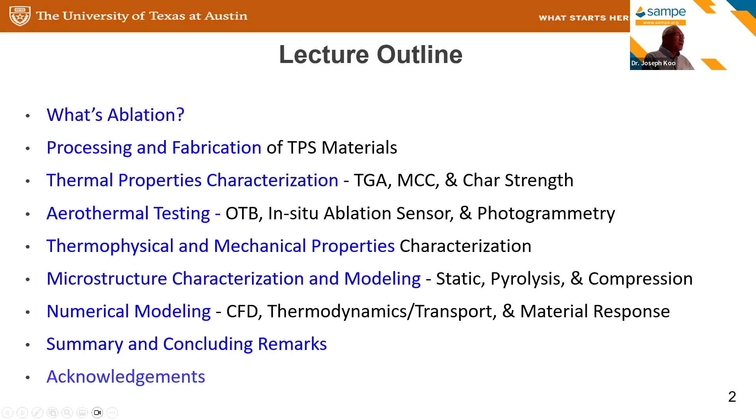And I'll move on to aerothermal testing. Within that particular area, I'll explain what OTB is and the other instruments that we use. I also will introduce you to thermophysical and mechanical property characterization. These are very important. I actually use exactly the same route that we have been using in designing material, analyzing material, as well as doing the microstructure modeling, and last but not least, I'll talk about material response modeling. And eventually I'll give you a summary and conclusion.

Okay, so first of all, I have two slides telling you what ablation is. If you go into the dictionary, you find that ablation is defined as the surgical removal or loss of a part. When it first came into the dictionary, it mostly talked about the thermal process of removal of snow and ice from an iceberg or glacier. But right now, if you Google what is ablation science, you could see laser ablation and thermal protection system ablation, TPS.

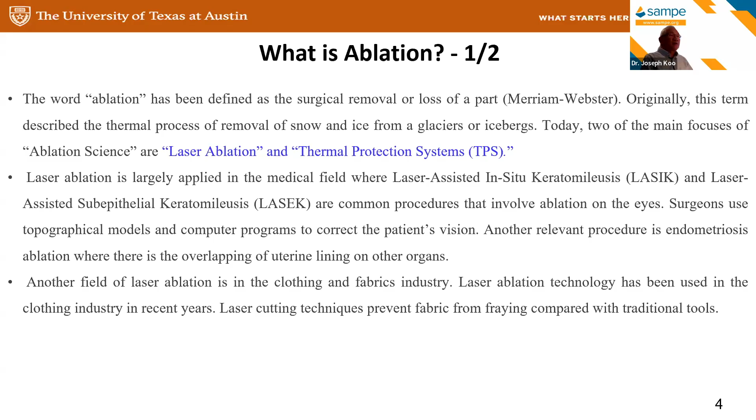I'm going to concentrate on TPS ablation, and I'm going to briefly talk about laser ablation, which is mostly in the medical field, having to do with LASIK and the like, and has been around for a long time. Another area where you could see laser ablation is in the clothing and fabric industry. They use it to cut the fabric so the fabric will not fray. Okay. In this seminar, I'm only concentrating on my area of expertise, which is ablation for thermal protection systems as well as for rocket motors.

Probably everybody knows that in World War II, there was the German V2 missile. That is where the demand for ablative material first started. I think these projects started the space program around the world, and ablative materials have been used for TPS as well as for other applications. I'm going to name a few: reentry vehicles, rocket nozzles, and also insulation for propulsion systems. These are the areas where ablative material has been used. Over all these years, there has been an extensive amount of research on ablative material testing and sensing, ablative material characterization, and numerical modeling. These are all very different areas that I will go over, and they are all interconnected. It's not just one area.

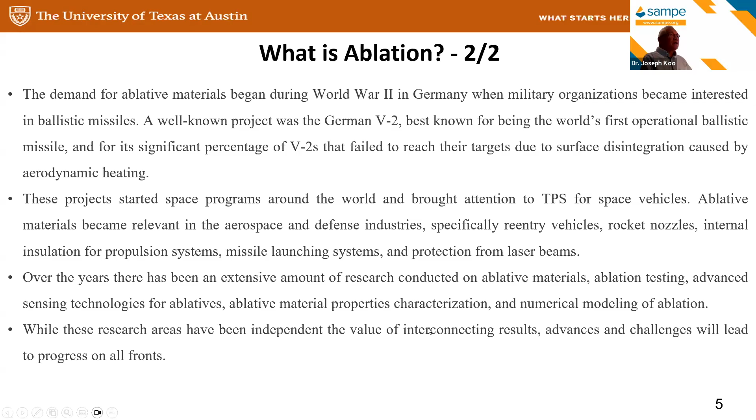Okay, I'm going to show you what we are doing in the Koo Research group. This is a paper I wrote and submitted to the SAMPE Journal in 2024. It will give you a lot of information in the open literature. So I'm going to go over this approach in a little more detail. First, we will process and fabricate these TPS materials or ablative materials. Then we do a first screening, which we call thermal characterization. That's where we use some of these instruments, and we will loop back later to do characterization of the thermal properties of virgin and char. Why is it important? Because eventually all these will be input into the modeling. After we have done some of these, we use them as screening. And afterwards, we will do

aerothermal testing. In our lab, we have a very low-cost oxyacetylene test bed. We don't just blast material. We do a fair amount of what I call advanced diagnostics. And eventually, you will go to NASA's HyMETS arc jet or the AEDC arc jet, but those are very expensive and have a long lead time. Another area that I will discuss a little bit is microstructure analysis. We need to know the mechanism of how these materials perform well. We have done a fair amount of SEM, and 3 years ago, we started doing synchrotron micro CT analysis at Berkeley National Laboratory. Some of this data we will use to calculate properties based on the micro CT data.

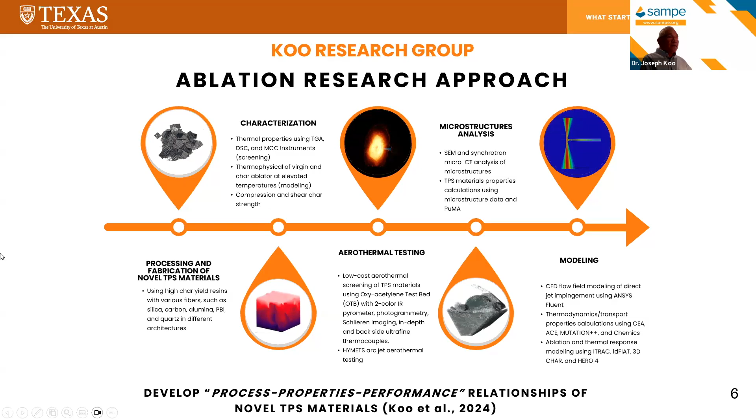Okay. Last but not least, we will do modeling. We will do CFD modeling, thermodynamics and transport calculations, and these will provide the surface response of these materials, and we'll fit all these into ablation modeling. These are computer codes we use in our group. Why is it important? If you start developing material, you never go through this process. You are always testing material, but the designer is going to come back and ask, well, how thick should the material be? What are my predictions? That's why we do a fair amount of material response modeling. Today, I'm going to go through this approach, and we're using this in a lot of projects. And I'll give you some examples.

So the very first thing I'm going to talk about is processing and fabrication, because we are examining all these new materials, not just the traditional ones.

So I'm going to give you 3 examples.

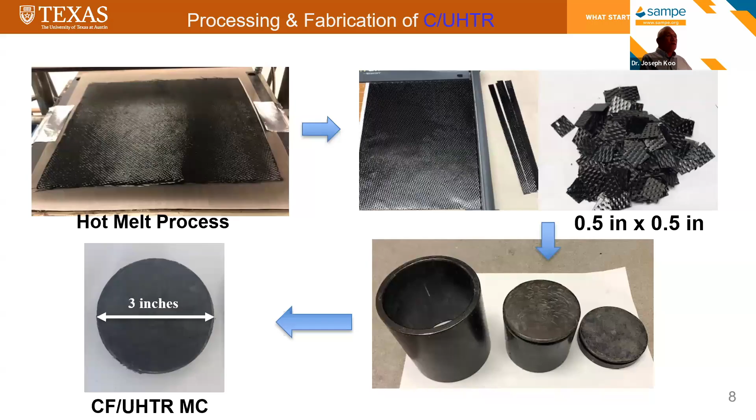The very first one is carbon UHTR, which is a resin system we've been working on with a polysiloxane. We use hot melt, molding compound, and compress these into carbon UHTR molding compound materials. That's one way we process and fabricate carbon UHTR, same as carbon phenolic. We use a fair amount of those in our lab.

The next one is what you call dual layer TPS, which is part of my student's thesis. We examine different layers on the right-hand side: we have two layers of material. The top one is ablative, able to withstand very high temperature, and the bottom layer is insulative. You combine this concept into a dual layer.

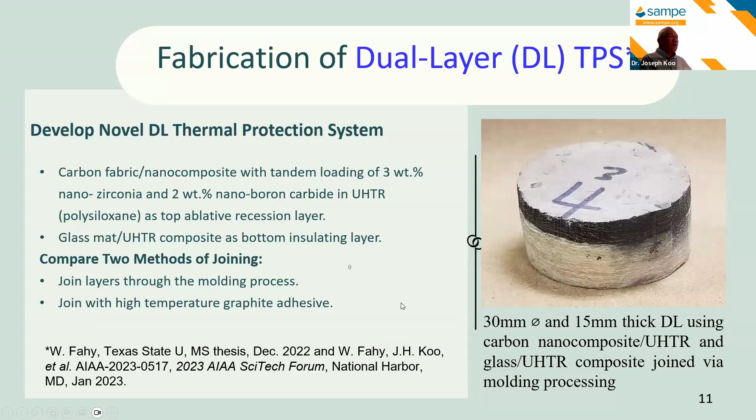We're picking this up from NASA. NASA Ames has been using this particular concept to do dual layer. We use that in our lab, and we develop these materials in our laboratory.

The third and not the last one is what I call low density flexible ablative, which we've been working on for a number of years. We use a very high char yield resin called UHTR, which is polysiloxane, and different types of low density felt, ranging from graphite to carbon, PBI, quartz. That's what we developed in our laboratory.

We were able to use a very small scale in our lab and develop the procedure. You can see that we choose different resins and use different felts, and we were able to do all this development in our lab.

We were able to use roughly 6 by 6 inches in a steel pan to develop the process and fabrication procedure. These are called low density because they range from roughly 0.3 to 0.35 grams per cc.

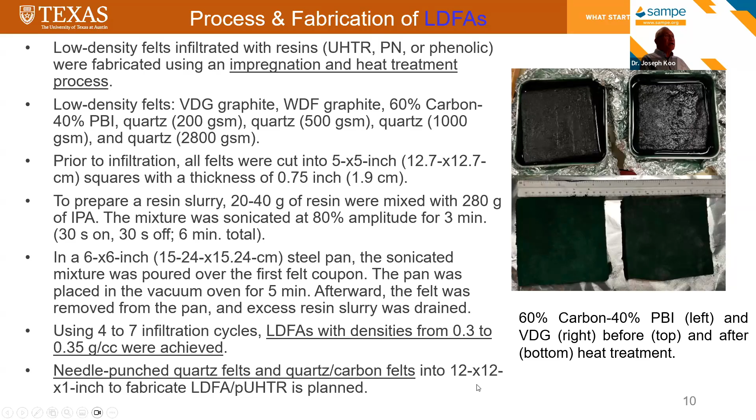We're moving forward with new development on needle-punched quartz or quartz carbon fabric, and we're getting into bigger size, scaling up. So those are the three different types of materials we are developing in our laboratory.

The next area I'm going to talk about is thermal property characterization. We use TGA, we use MCC, we also use char strength sensors to examine the compression and shear char strength of these materials after exposure to an oxyacetylene torch. These are instruments we use to learn more about the materials we are developing, and we'd like to learn the mechanism of why it's working so well.

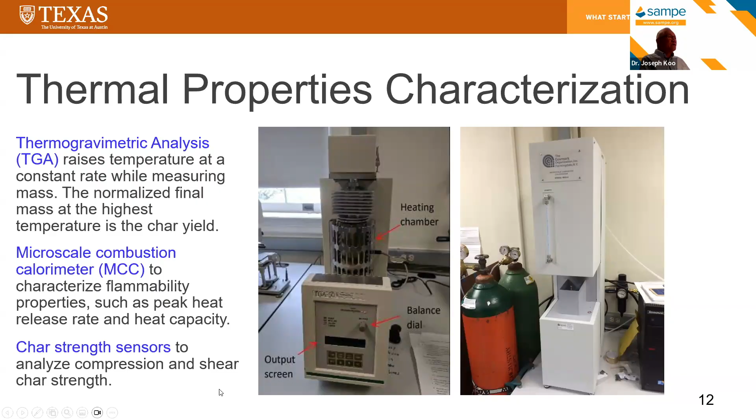The next thing I'll discuss in this seminar is how we actually measure char strength, because char is very important in ablative TPS, as well as ablative for solid rocket motors. So we were able to develop these instruments in our lab.

These are what I call compression char strength sensors. We have a linear actuator; we put the materials in here, and we're able to measure the compression char strength. These were all designed and made by my students at UT.

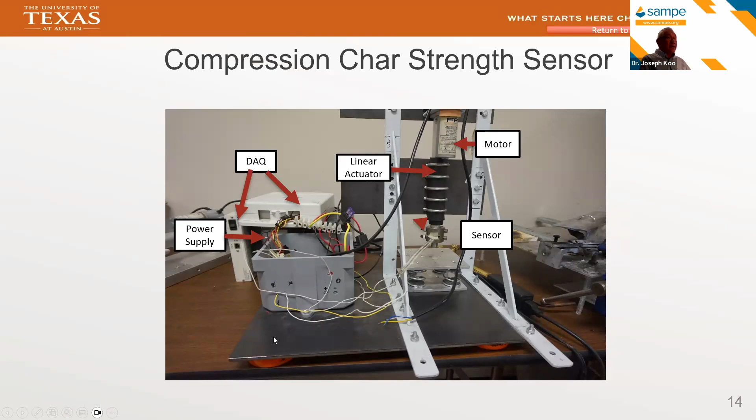This is another one we call the shear sensor, another sensor we developed in our lab. We use the same data acquisition system, and we developed another test stand to measure the char strength.

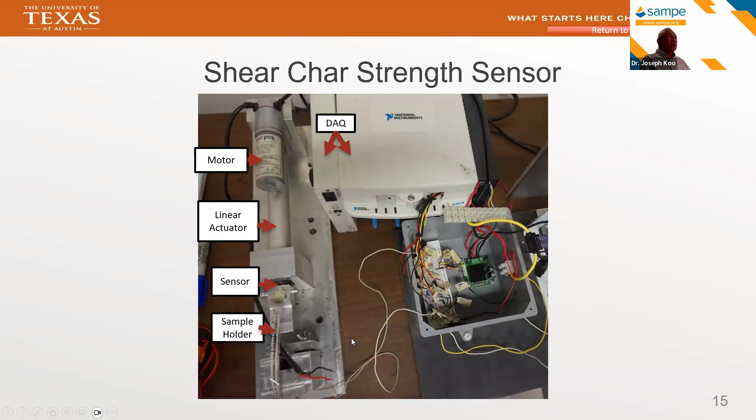I'm sharing some of the data we've been collecting, materials we've been developing mostly for the Department of Defense. This is using Kevlar EPDM, a solid rocket motor insulation, where we used a small amount of multi-wall carbon nanotubes, and we were able to see the average energy dissipated. This is how we quantify the strength in compression as well as shear.

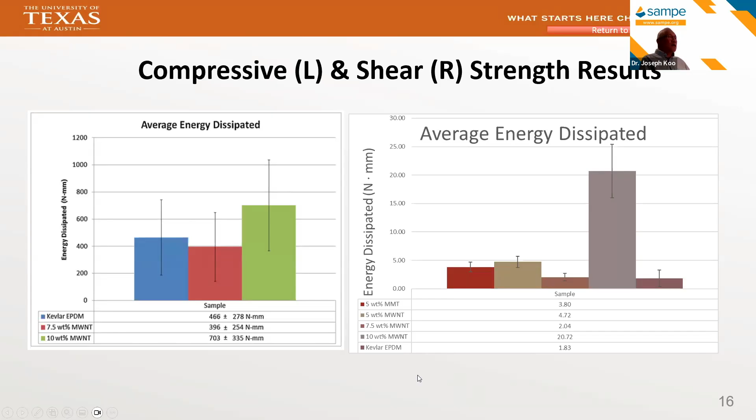Don't pay too much attention to the numbers. What I'm trying to convey is a methodology we developed to understand why this material is working well. We were able to combine and correlate some of this data to performance, and that's what we've been doing.

Another area we spend a fair amount of time on is measuring in-situ ablation, recession, and thermal sensors.

These are technologies we've developed throughout the years, and these were actually funded by the Department of Defense. We published a fair amount of papers, and you could get more detail on these papers after the seminar.

These are the in-situ thermal ablation sensors that we developed in our lab. You can see we actually use ultrafine thermocouples, roughly 0.25 millimeter or 250 micron. We're able to insert these sensors at different standoff distances from the front, and we were able to collect data from that.

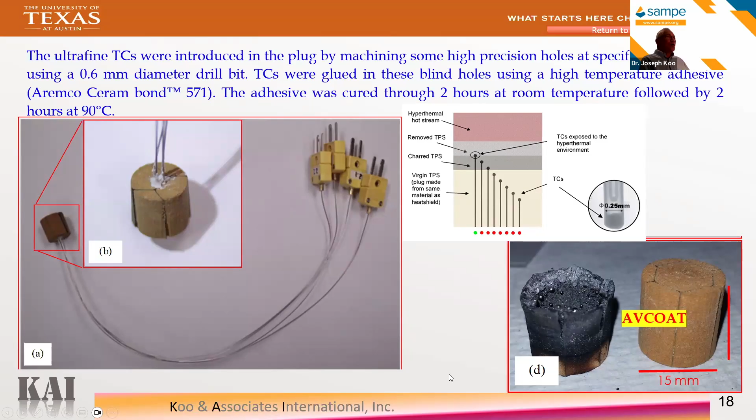One of the materials we received from NASA is the AVCOAT material, and we were able to do all that. This technology was able to be applied to examine different types of materials.

We've been using this technology to measure and calculate the recession rate, and to take a look at the density. These materials range from 0.3 grams per cc all the way to ceramic matrix composites at 1.83 grams per cc.

What it means is this technology is very versatile. We're able to use it on a variety of TPS materials. So that had been published, and we were able to develop this particular technology and use it in our materials development.

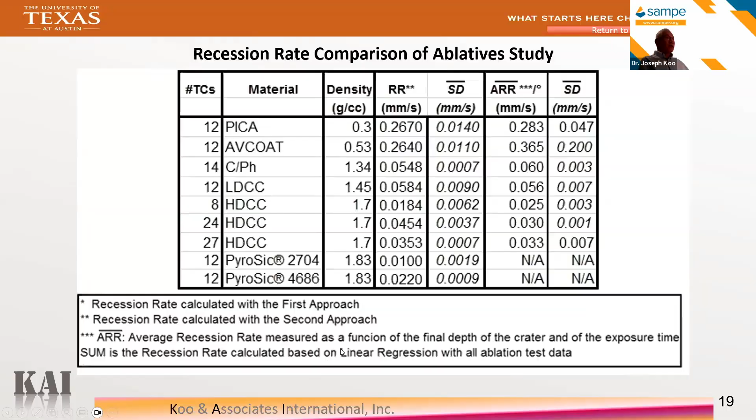The next area I'm going to share with you is aerothermal testing. We've done a fair amount of work in this area. We don't just blast materials using the oxyacetylene test bed, OTB, we also developed photogrammetry, and I'll go over it a little bit in detail. We use schlieren imaging to understand the flow field.

So this is actually the setup. If you are around the UT area, I invite you to come visit our lab, but you need to give me some warning first. This is something we actually developed at UT.

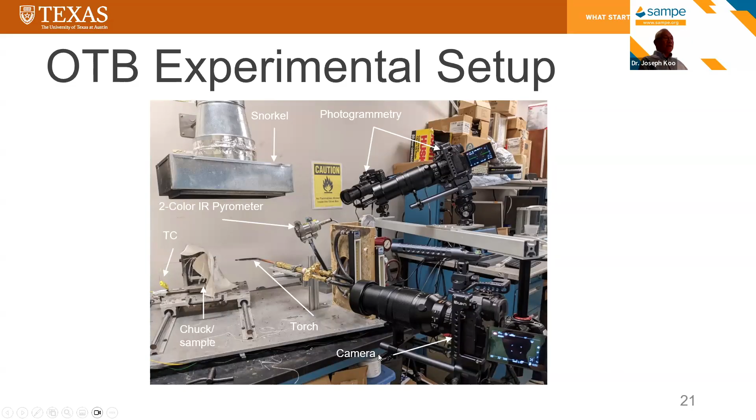We have an oxyacetylene test bed. We use photogrammetry so we're able to measure the in-situ recession during testing, and we were able to use a two-color IR pyrometer, and we'll show you what data we're collecting during the testing.

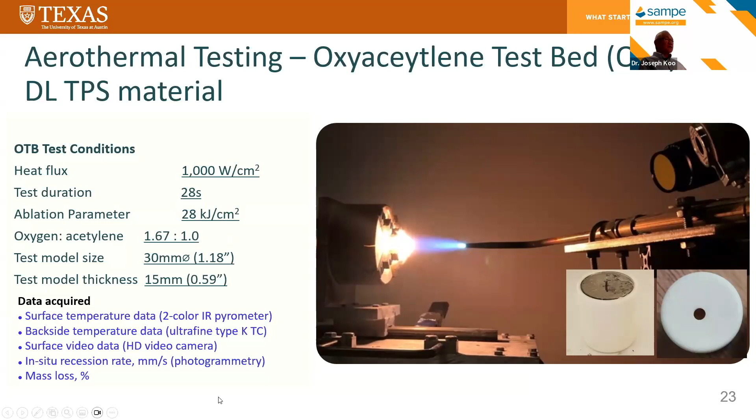This is what I'll share with you: a glass polysiloxane material exposed to 1,000 watts per cm squared for 28 seconds. The big difference is, with glass, you can see all the glass melting.

And here is carbon. This is actually a formulation that we developed, a carbon nanocomposite. We include some nanomaterials in the matrix. These are the things we collect during testing, not just blasting the material.

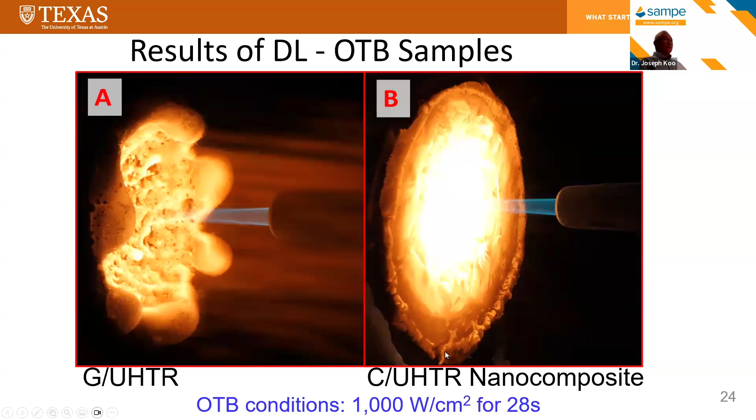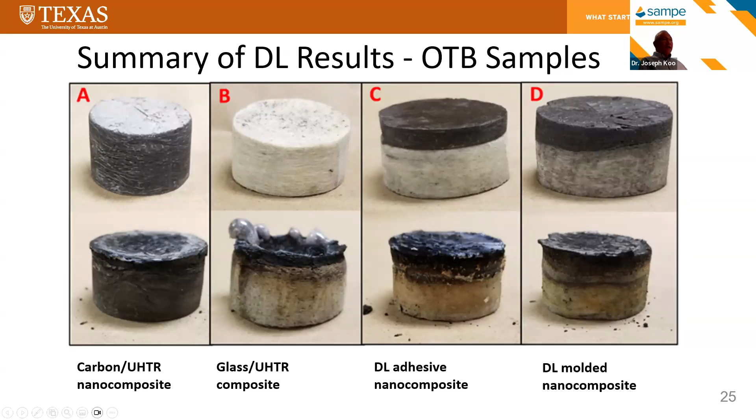We actually use adhesive bonding or compression molding them. There are differences between all of these, and we have written about them in technical papers. So if you're interested in that, you should refer to those papers.

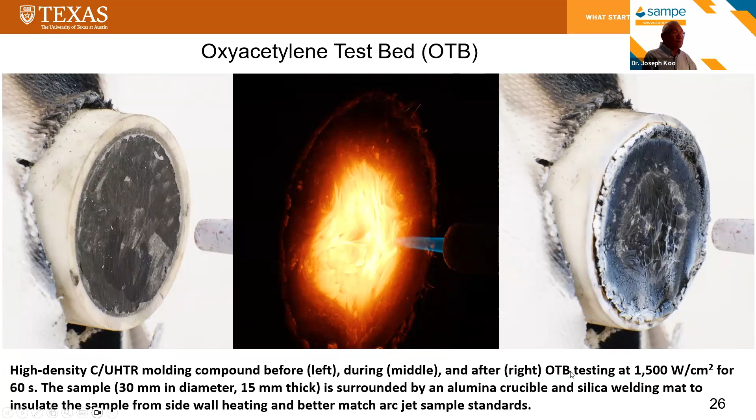This is only a screening test. We are not correlating these results with ArcJet, but if you use this kind of methodology to screen your material, you'll be able to move forward to the more expensive ArcJet testing or other testing required by your sponsor.

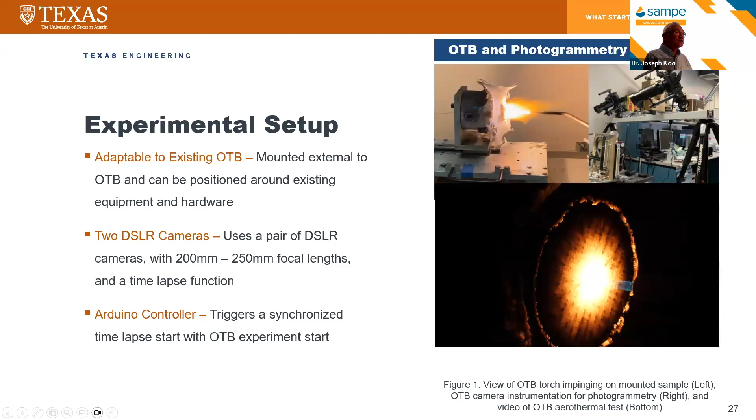So this is something we started developing, called photogrammetry. Photogrammetry is a technique where you use two cameras to map the in situ recession during testing. This is what we do, in what we call a workflow.

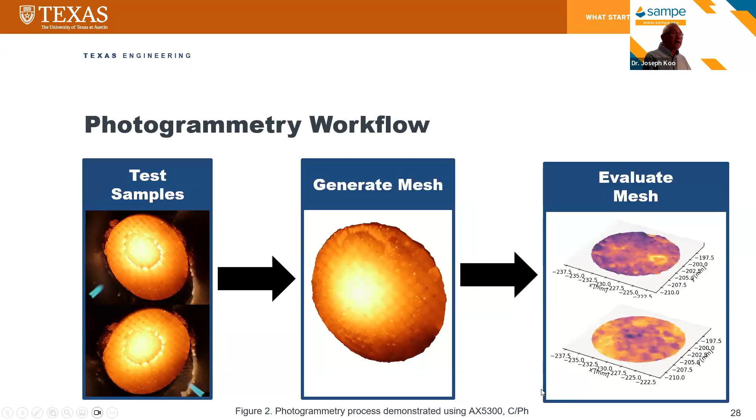We have the test samples and we generate a mesh, and we use the two cameras and the in situ data we are collecting. This is what you could see, that we're able to calculate the in situ recession rate of these materials we tested in our lab.

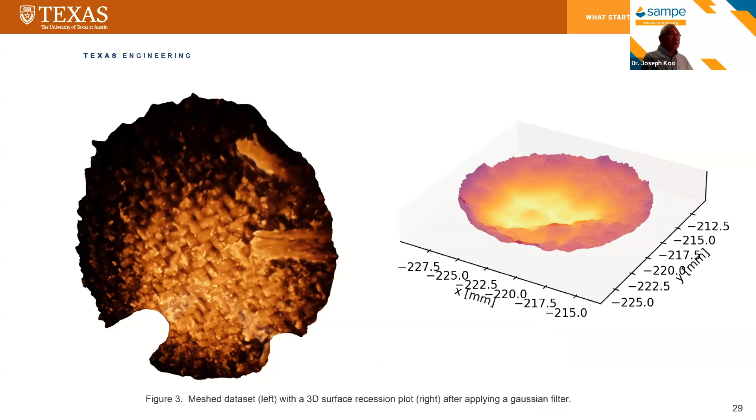This is a good example where you can see a surface recession plot, and this is all my students doing. This is all research, and we modified this particular technique so we could use it on a lot of the ablative materials we develop in our lab.

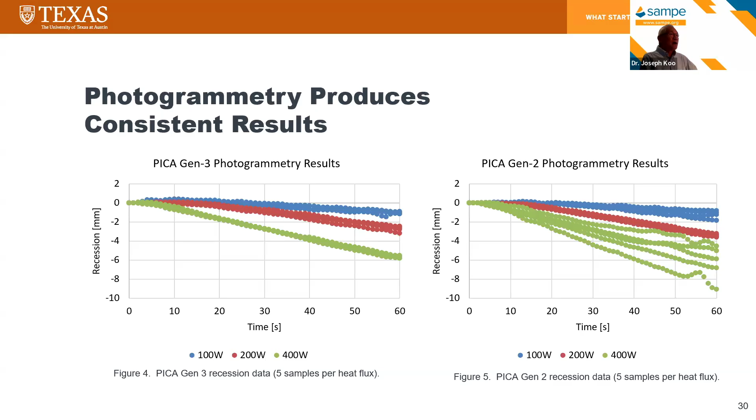This is a comparison showing why we use different heat fluxes, to see if we can use photogrammetry to measure the actual recession and compare it with experimental recession. Experimental recession is basically what you measure before and after. Photogrammetry is in situ.

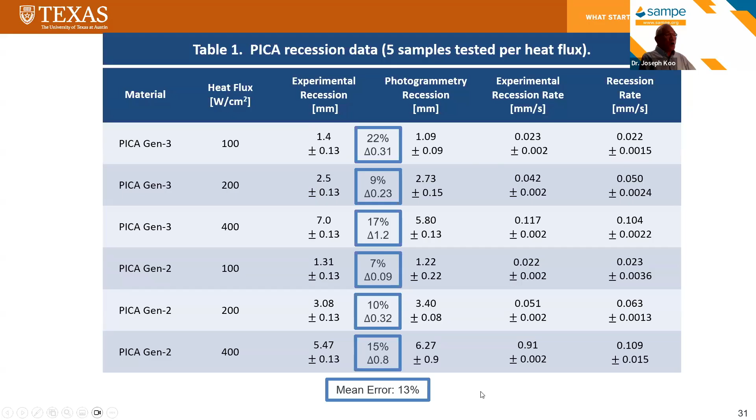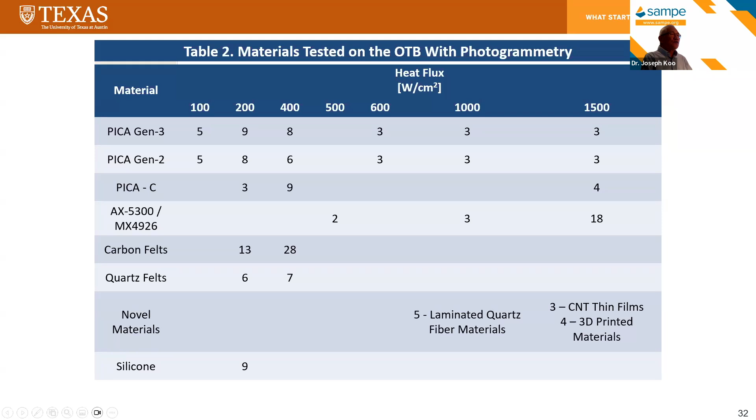We were able to do all this and calculate the standard deviation, and the error we see is very small, 13%. So we now have a map of the different types of materials we are collecting. My student is going to present some of these results at AIAA SciTech in January in Orlando. These are the different types of material we've started collecting using photogrammetry in our lab.

We are also linking with some of the CFD models developed in our group, and these data will help us validate our OTB-like CFD model.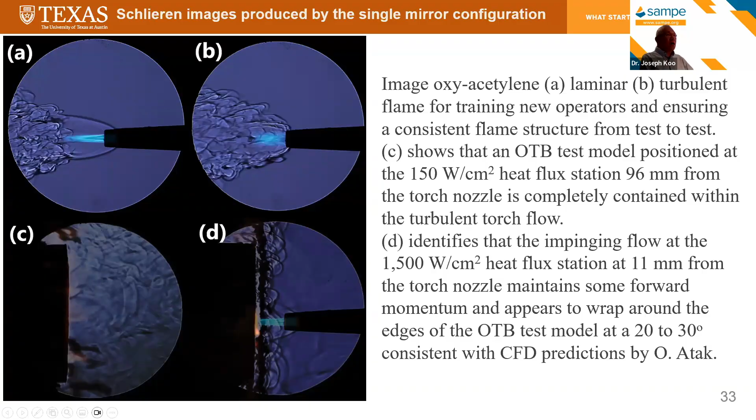Okay, so I'm going to go over the thermal, physical, and mechanical property characterization. This is very important because if you develop a material and test it, you really need to know the thermal physical property as well as the mechanical property. I'm just showing you some examples. These are very detailed measurements, and we have to do it for each material.

Certain materials, we already have these data. The two materials we have data for are PICA and carbon phenolic. We have to measure properties we don't normally do, so we actually send samples to another laboratory, TPRL, to do that. They do a fair amount of the thermal physical property, virgin property, and a whole bunch of parameters.

These parameters, including pyrolysis properties, char property, and surface radiation properties, are all required to do material response modeling. This is something urgently needed, and we are now slowly characterizing some of the newer materials. These thermophysical properties are required in detailed material response models, which is why I highlight this - they are urgently needed for new TPS materials as well.

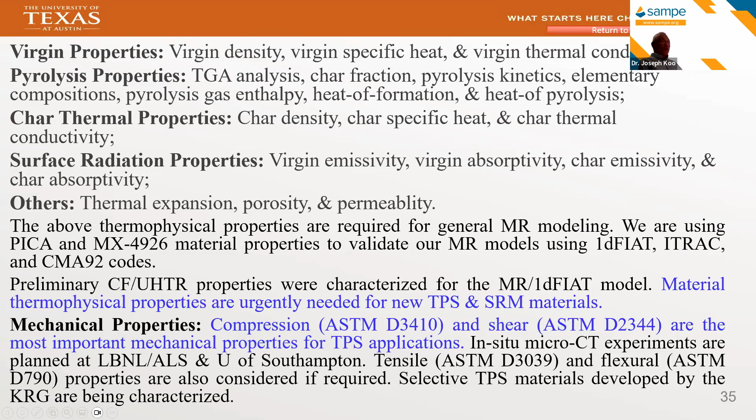Not just mechanical property, not just thermophysical property - we are now doing mechanical property work, and we are starting to use the Lawrence Berkeley advanced light source facility in Berkeley. We will be able to do micro CT, and we work with University of Southampton to do these measurements at room temperature as well as elevated temperature in Berkeley. So what I'm sharing with you is new - we are now characterizing only a handful of properties, and these are the properties we need to characterize.

What I'm showing you is virgin and char specific heat as a function of temperature, for both virgin and char material, and we also measure the thermophysical property with respect to temperature for virgin and char. These are non-existent otherwise - only PICA or carbon phenolic has been characterized by Department of Defense, and these are required to do material response modeling.

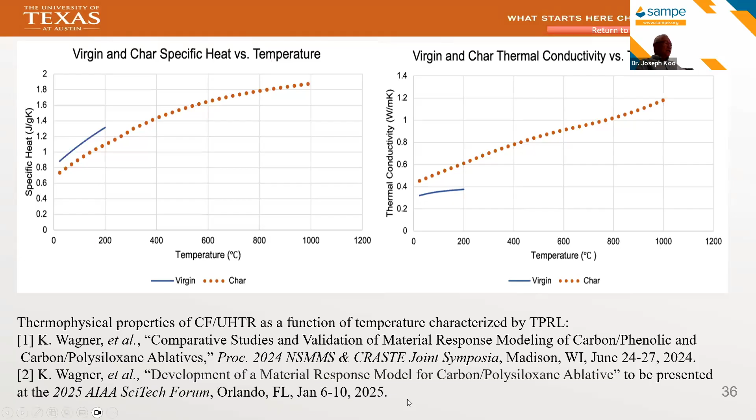We are now starting to ask: can we use a small amount of property data and fit these properties into the model? How good is the material response modeling? This is actually one of my master's students, Kaylin, who finished that work, and it will be presented at AIAA in January. So the next thing I'm going to talk about is microstructure characterization and modeling.

We have published a fair amount of this in the open literature. These are the microstructures using SEM. SEM has been used to understand the microstructure, and I'm showing you the virgin material. PICA is a carbon phenolic material that has been around, developed by NASA Ames, and my student will do SEM of the virgin material. When you examine the char, the phenolic resin is all pyrolyzed, and these are all carbon fibers coming onto the surface.

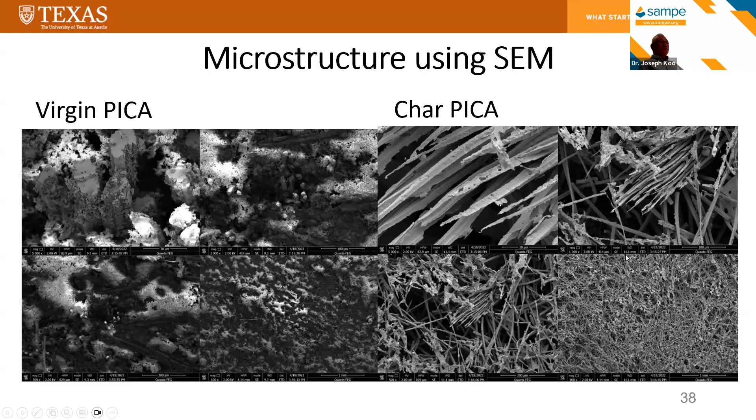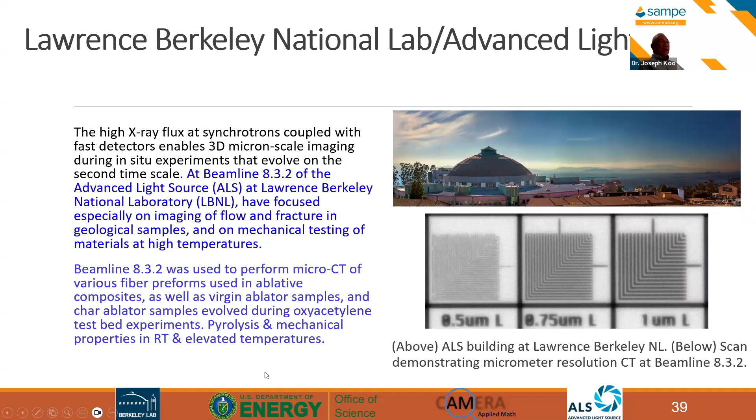These are surface methodology. In 2022 we started going to Lawrence Berkeley Lab Advanced Light Source, using Beamline 8.3.2. This facility is phenomenal - we were able to perform micro CT computed tomography of various fiber preforms used in ablative composites. We examine the virgin material, the char, and we've already examined some of the pyrolysis and mechanical properties at room temperature and later at elevated temperature. This is a phenomenal facility.

This is a micro-CT setup using hard X-ray; you do a 2D scan and use software to reconstruct a 3D structure. That gives us a lot of insight into the material's behavior. With SEM you can only do 2D, but with micro CT you can do 3D.

What I'm showing you is that we use Dragonfly software, and the majority of other universities and laboratories have been using Dragonfly to reconstruct 2D images into 3D images. We were able to complete three series of micro CT experiments at Berkeley, and the majority of them will be published in the open literature.

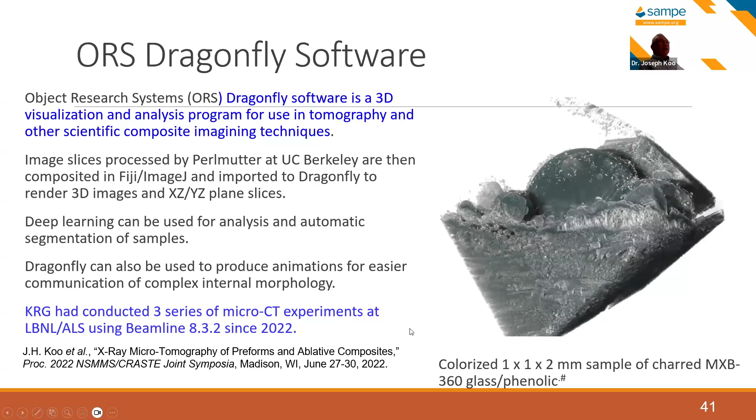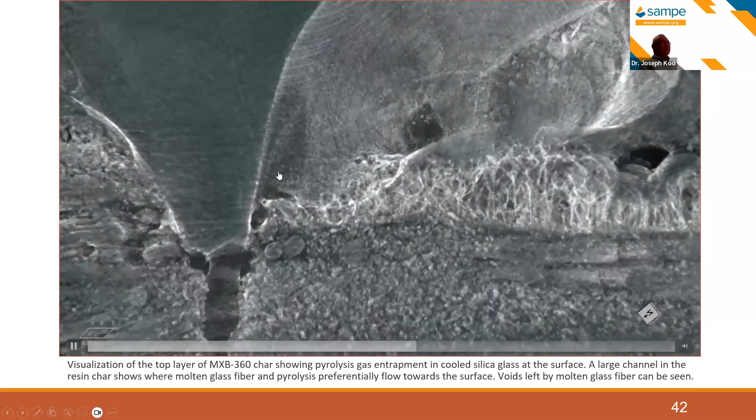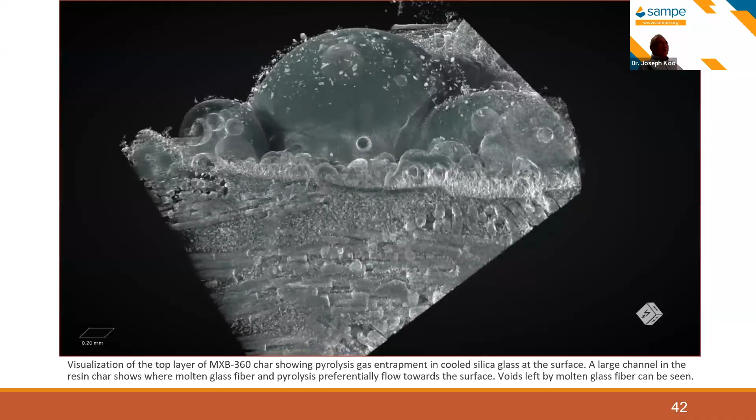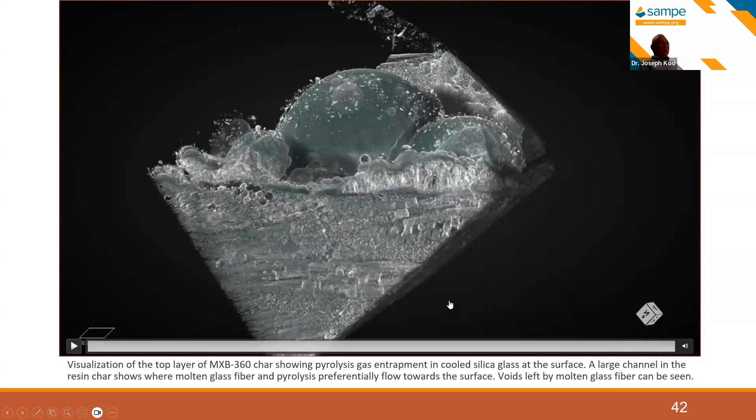What I'm sharing with you is a 3D reconstruction of a glass phenolic. We have all these 2D structures, and we use Dragonfly to reconstruct them into 3D. What I'm sharing with you is material like MX4926 - if we use the 3D microstructure, we could understand the material a lot better, and it provides us with insight. These are very useful tools that people have been using, and now we're starting to use them on traditional materials as well as new materials we are developing.

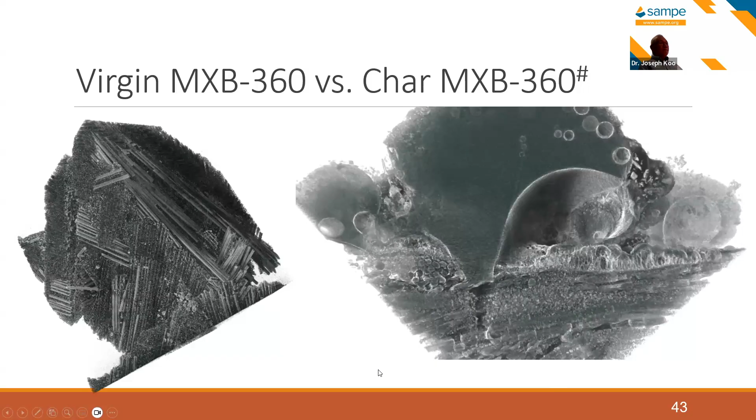You can see the big differences in the morphology of these materials.

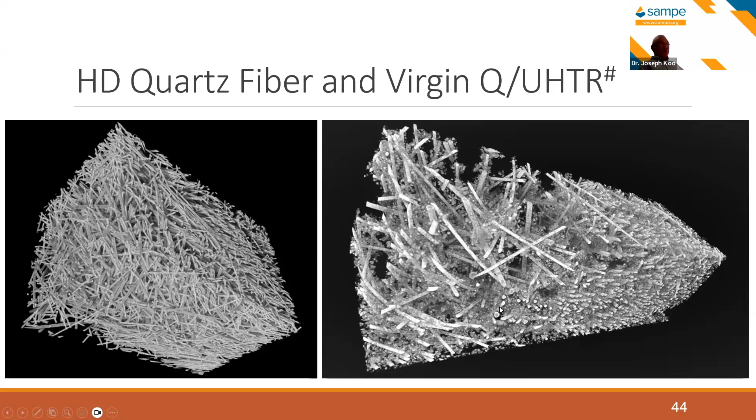So this is something that we started to examine, high density quartz fiber. What you see on the left hand side is actually a quartz fiber that we received from Saint-Gobain, and we were able to use micro CT in Berkeley to generate 3D structures. On the right hand side, you can see a virgin quartz infiltrated with polysiloxane, and you can see all these particles of UHTR in the material. On the left side, that's just a scan of the quartz, and on the right side, you can see how the resin infiltrates into that particular quartz fiber. This is what you see in a virgin sample.

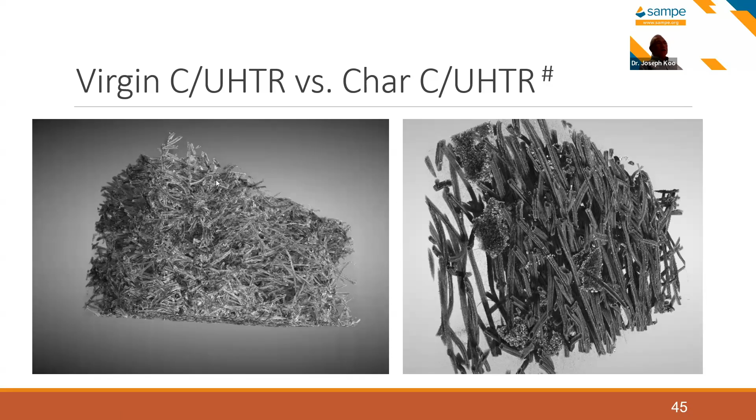What is that for carbon UHTR versus the char? In the virgin, a fair amount of this UHTR resin is still stuck on the fiber, but as soon as you expose it to an OTB at certain heat fluxes, the resin is going to pyrolyze. This kind of understanding helps us have better insight into why the materials are behaving so well. This is what I call the mechanism of why these materials we're developing work.

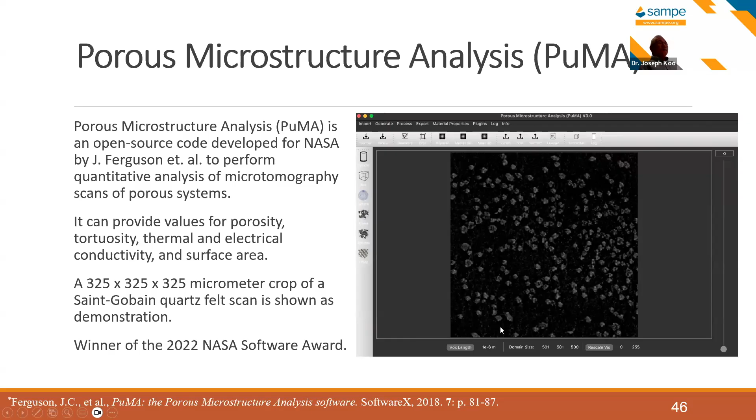Using the micro CT and a software developed at NASA Ames called PuMA, we're able to calculate some of these properties, using the micro CT data and this particular software to provide us with some of the properties that we are interested in.

This is something that we are working on with Florida State, who were able to measure the thermal conductivity using their C-therm system. We were able to measure the char and virgin of some material we're developing - this is actually a graphite UHTR, this is another graphite UHTR, and the third one is quartz UHTR. We were able to measure these - we sent the materials to Florida State, and they have an excellent, High Performance Materials Institute at Florida State. So we were able to measure the thermophysical properties of these materials.

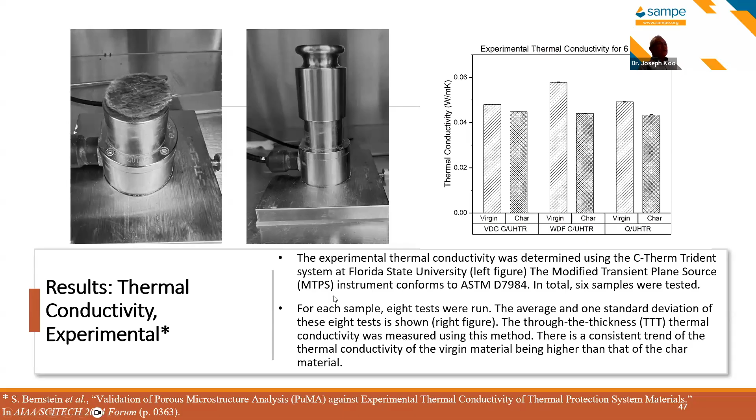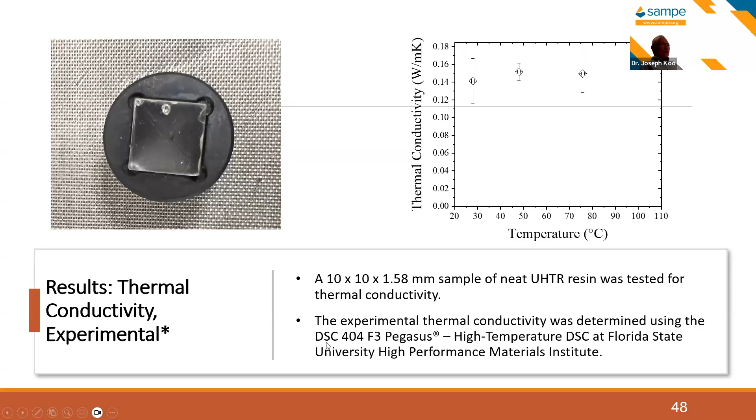We were able to measure through the thickness. In order to calculate some of these, we have to measure the thermal properties of the virgin, of the resin, and of the fibers. The thermal conductivity measurement was done at Florida State, and for the fiber we were using the technical data sheet from the fiber manufacturer. We're able to do all these and fit all these properties into the software.

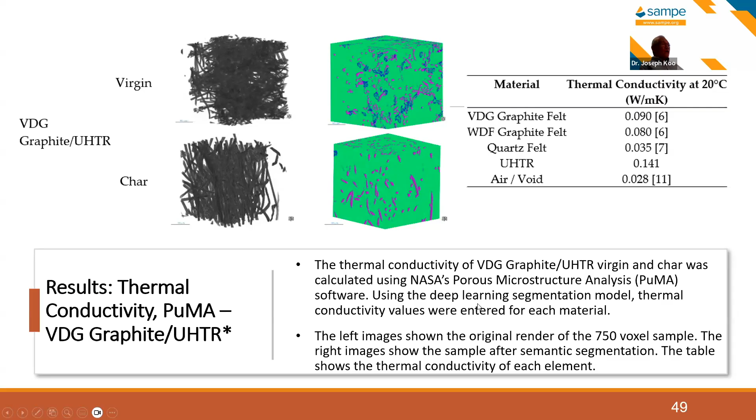The PuMA software will be able to calculate and provide you with properties using a deep learning segmentation model, and we'll be able to calculate some of these thermophysical properties through the thickness. This software will be able to calculate at X, Y, and Z. For the experimental work, we were only measuring through the thickness, which is the Z direction. We are not able yet to measure the X, Y, but with this micro CT data and the software, we may be able to provide a lot more insight into the material's thermal conductivity and other properties that you'll be calculating.

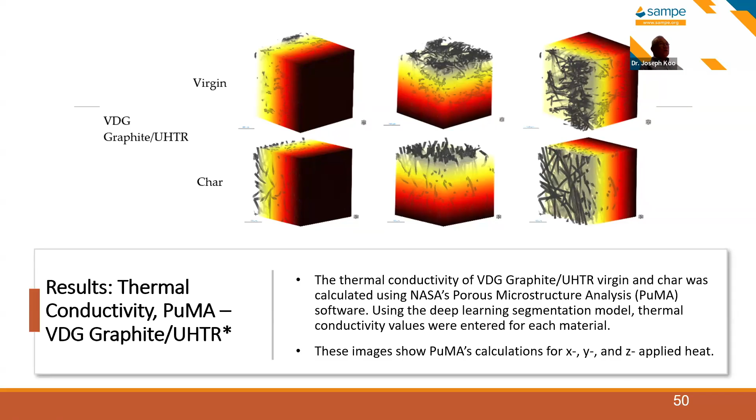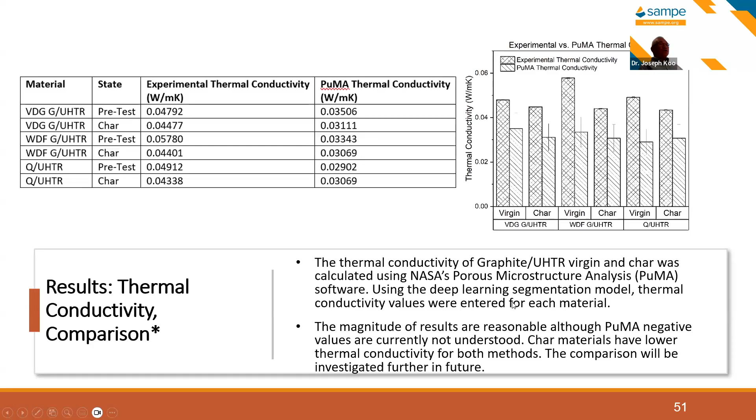So the last but not least piece I would like to share with you is materials modeling. This is an area that we are now exploring, and we use a fair amount of computer code that has been used by NASA as well as Department of Defense and Northrop Grumman - we were privileged to have access to this computer code.

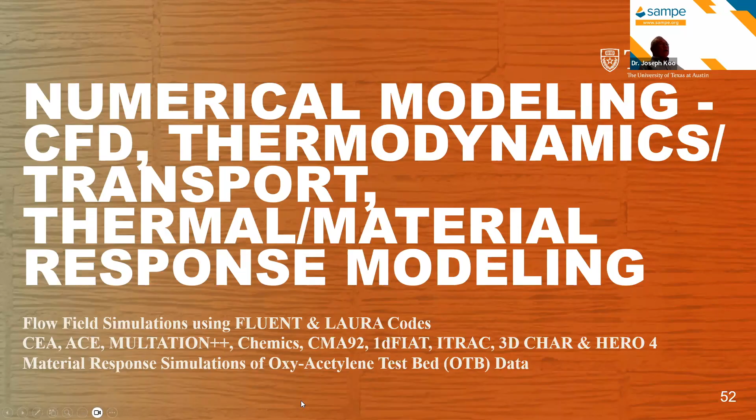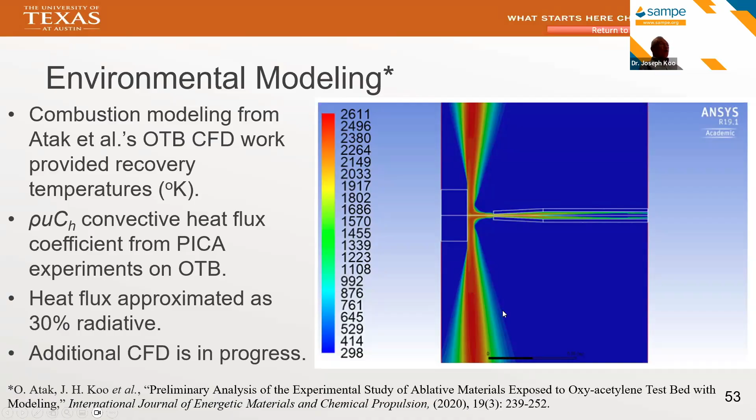My student will be able to calculate the B-prime table and other things that we need in order to calculate the materials response model. This is something we are working on using Fluent to calculate the direct jet impingement and the flow field parameters. These flow field parameters we have to set back into the materials response model, and that's what we are now doing, simulating the CFD flow field with our OTB.

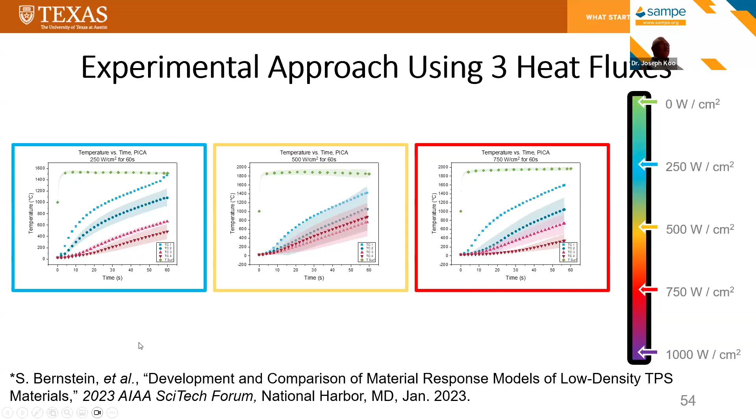So this is something we have been doing: experimental three heat fluxes. This one is 250, this one's 500, and the last one is 750. These are conditions that we test, and this is the PICA material that we were able to measure. These are all experimental data that we are collecting with a variety of heat fluxes, the standard heat flux that we test in our lab. We are using PICA material, and this is from open literature so you'll be able to see how this material behaves in these kinds of conditions.

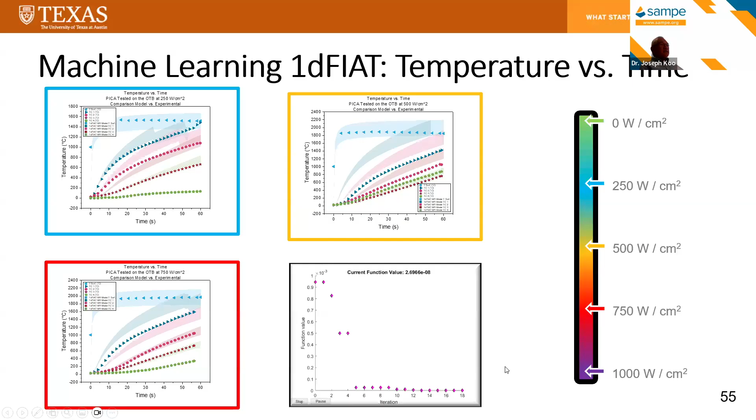So the next thing we do is we use machine learning, and we use 1D FIAT, a program that you will be able to obtain from NASA Ames, and we form a material response model. We use that along with the thermophysical property I just explained, and use the OTB experimental data to provide us with a material response model. What you're seeing here is how the calculated versus the experimental data compare, and this is what we're doing with different heat fluxes. My students have actually published these results.

So that's the one I'm very excited about: the new materials we are now developing, and the new thermophysical property that we asked a third-party lab to provide us. We were using limited thermophysical property, and we formulate a materials response model using 1D FIAT, and these are what we're comparing for modeling and experimental data. It's not too bad when you examine these at different heat fluxes. This one is the lower heat flux of 500 watts per cm squared, and my student has done 500, 1,000, and 1,500. This will be presented at AIAA SciTech in January.

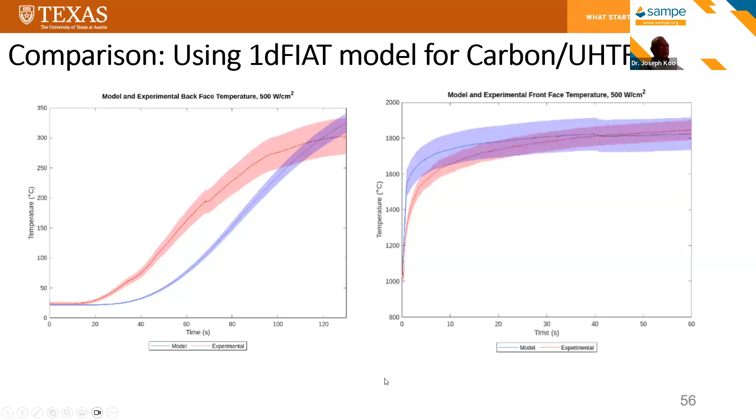So what we have done, I'm going to summarize. I've gone through a lot of things and a lot of capability, and I want to summarize it. What we did is we developed several integrated technical capabilities within the KOO research group. We use that to analyze TPS material, and we are now using some of those for solid rocket motor.

We were able to demonstrate throughout the year using in-situ ablation and thermal sensors on a variety of TPS material. We validate some of these models using the 1D computer codes: 1D FIAT, CMA92, and ITRAC. That's actually a computer code from Northrop Grumman.

We also plan on using another computer code called Chemics, developed at Northrop Grumman, to calculate the B-prime table. And can we use the new development along with our experimental data, and eventually we'll develop materials response models using more sophisticated computer codes: 3D Char from NASA and HERO 4 from Northrop Grumman. I think these are the computer codes available in the US. Probably in Europe they have another set of computer codes they're using, maybe in Germany or in France.

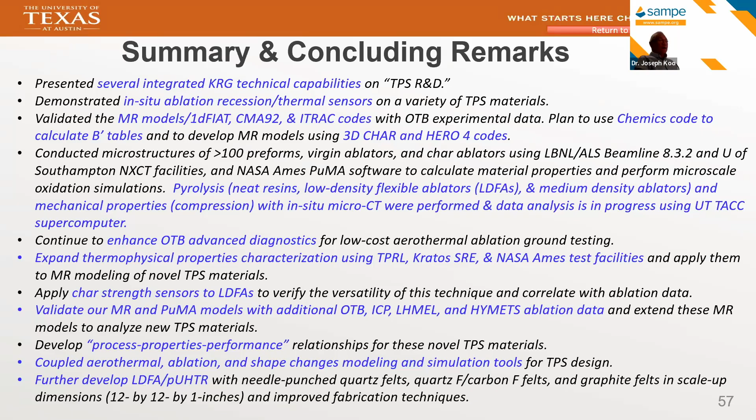Last but not least, I would like to acknowledge all our funding agents from Department of Defense, NASA, and some of the private companies. I also would like to thank my current and former students for contributing to this research, the folks from NASA Johnson, and the folks from NASA Ames helping us, as well as Northrop Grumman helping us.

Last but not least, we have been very appreciative of Dr. Parkinson from Berkeley for teaching us how to use micro CT, and we are now collaborating with University of Southampton to characterize the microstructure, as well as Matt from NRL helping us grind some of this polysiloxane material for our other development.